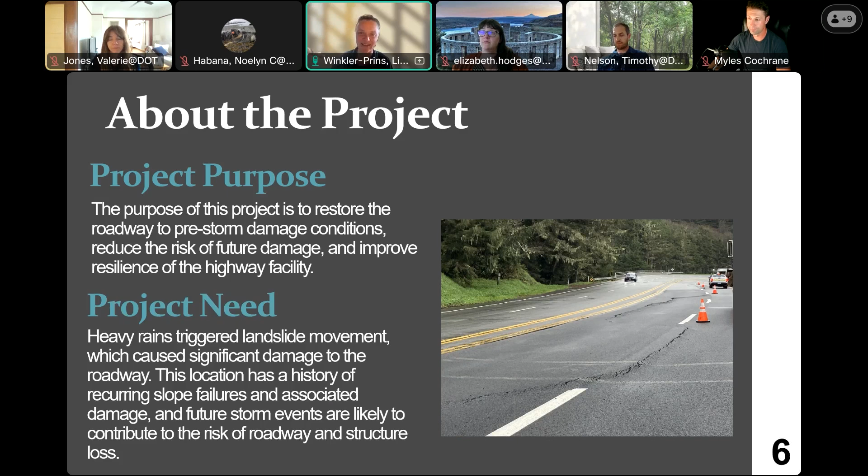And now I'm going to pass it over to June, our geotechnical specialist, to talk about the landslide at the project site. Hi everyone, I'm June, and I'm the project geotechnical engineer. I will now go over some of the key details of the landslide affecting the highway.

The project site is located at the southern edge of the Last Chance Grade Slide Complex. The site is in Franciscan melange geology. This melange consists of a mix of highly sheared siltstones and shale, interspersed with intact sandstone blocks of varying sizes. As you guys probably already know, this terrain underlain by melange is prone to earth flows.

The earth flow at this location that is damaging the highway is approximately 800 feet wide. The head of this slide intersects the road surface, causing an offset crack and settlement that is impacting both the south and northbound lanes. The slide has been measured to be moving at a depth of 90 feet below the highway and toes out onto the beach.

Additionally, the base of the slide along the beach shows signs of ongoing coastal erosion, which in turn exacerbates the global slide movement and creates numerous smaller nested slides.

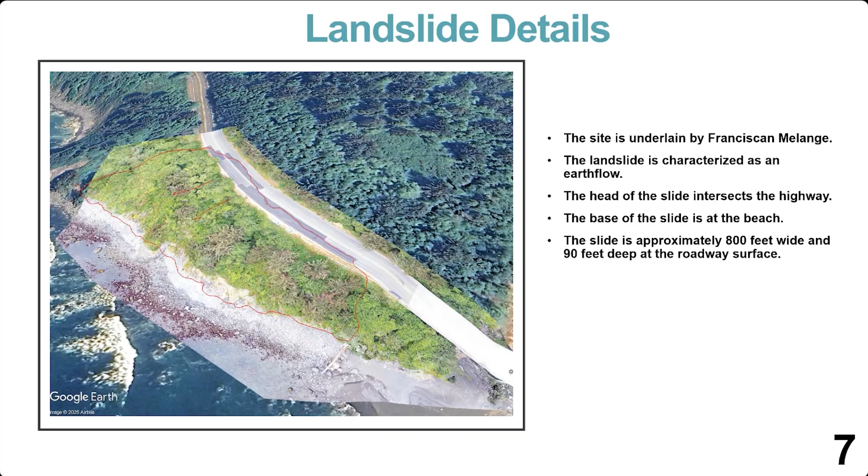The project is located on US Highway 101 in Del Norte County, California, between post miles 12.6 and 13.2, which start near the DeMartin Beach parking lot and approximately a half-mile north at the Vista Point.

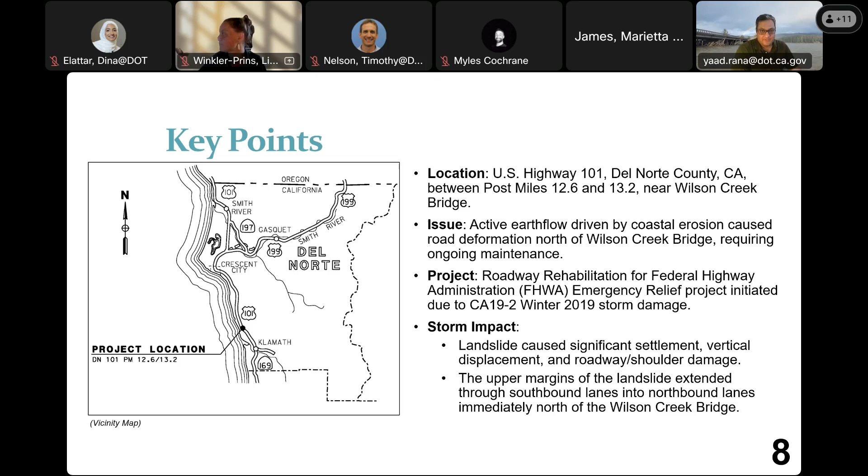The scenic stretch of highway is vital for regional connectivity, but it faces unique geologic challenges. A 2019 storm triggered a landslide that caused substantial settlement and vertical displacement of the roadway, along with damage to the shoulder, extending through the southbound lanes and into the northbound lane.

A value analysis was conducted to minimize environmental impacts, costs, and provide safe and reliable transportation access. The goal was to stabilize a critical quarter-mile stretch from post mile 12.69 to 12.95, immediately north of the Wilson Creek Bridge. This will be done through a modified roadway alignment and construction of retaining walls to contain the ongoing earth flow and ensure long-term stability.

The project will increase the curve radius from approximately 1,000 to 1,700 feet, a 30-foot shift east, which allows for a smoother and safer driving experience.

To shift the road east, a cut will be required that will be supported by a 600-foot long, 19-foot high soil nail wall. This type of wall is supported with steel bars grouted into the mountainside.

The western shoulder below southbound 101 will be supported by a 700-foot long, 55-foot high soldier pile ground anchor wall, or SPGA wall. This robust structure uses deep piles and ground anchors to stabilize the slope and will be buried, leaving only the top 10 feet of wall exposed to the beach.

The project also makes minor adjustments to the passing lanes. The northbound passing lane will begin immediately north of the soil nail wall, reducing its length from 1.54 miles to 1.26 miles. And the southbound passing lane will have a standard lane drop ending at Wilson Creek Bridge.

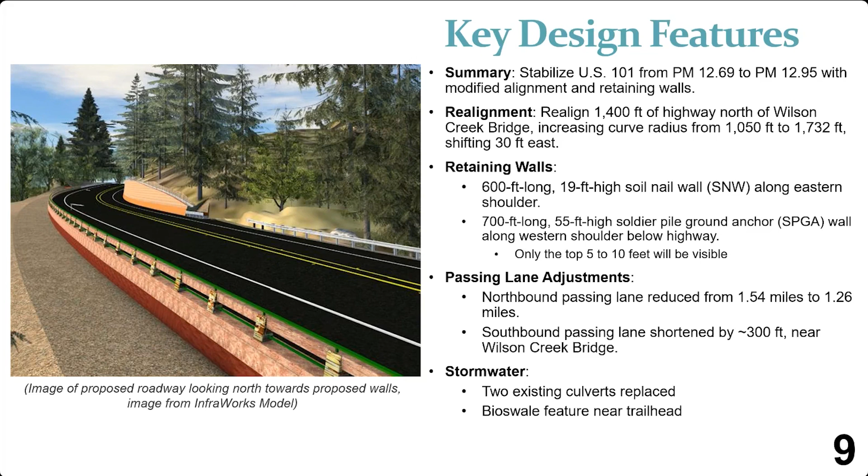Two culvert systems are proposed to be replaced within the project limits. Additionally, a bioswale will be installed to treat impervious runoff and will connect to an existing outlet.

The project will be constructed in two main phases for the construction of each wall, with a final stage for the remaining roadwork. Construction is proposed to start in 2028, ending in 2031.

Last Chance Grade, a large tunnel project just north of this location, is anticipated to start in 2031 and will be in close coordination with this project.

The first stage of this project will widen the highway eastward and construct the soil nail wall. During this phase, two-way traffic will remain open from Wilson Creek Bridge to the Vista Point at PM 13.2.

Once the widening and soil nail wall are complete, traffic will shift eastward to allow the construction of the SPGA wall below the western shoulder. This final stage will use standard traffic control for final paving, delineation, and any remaining work.

The project will utilize maintenance pullouts within the project limits for staging and equipment storage. Excavated material will temporarily be stockpiled at the existing southbound pullout at post mile 12.98 or at an environmentally cleared location off-site. Next are the aesthetic treatments for the project.

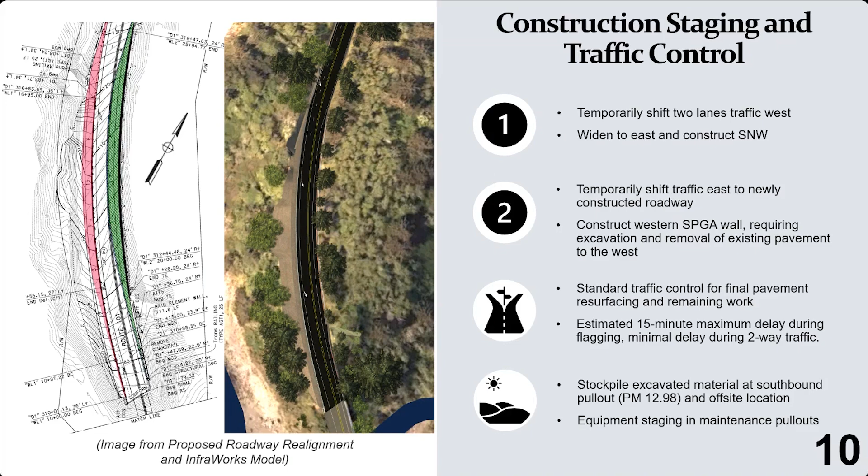The following slides show examples of aesthetic treatment that are being considered for this project. Final treatment will be determined during the permitting process.

When selecting aesthetic treatment for wall types, concrete barriers, and railings, we consider the natural beauty of the surrounding landscape and the large project corridor as a whole. Our design reflects context sensitivity that considers natural landscape, cultural history, and recreational use.

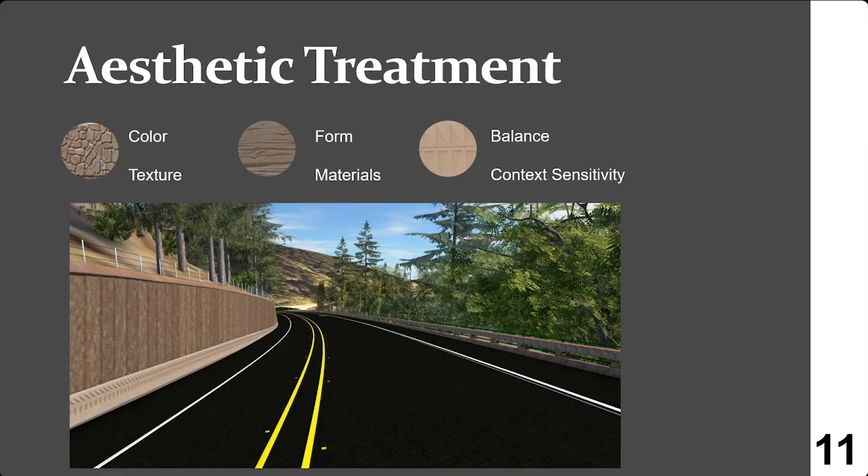We choose materials, textures, and colors that will blend in and complement the natural forms of the landscape. For the soil nail retaining wall on the east side of the road, we proposed a wood grain textured concrete facing that would be stained with a natural brown color to help it blend into the natural surroundings.

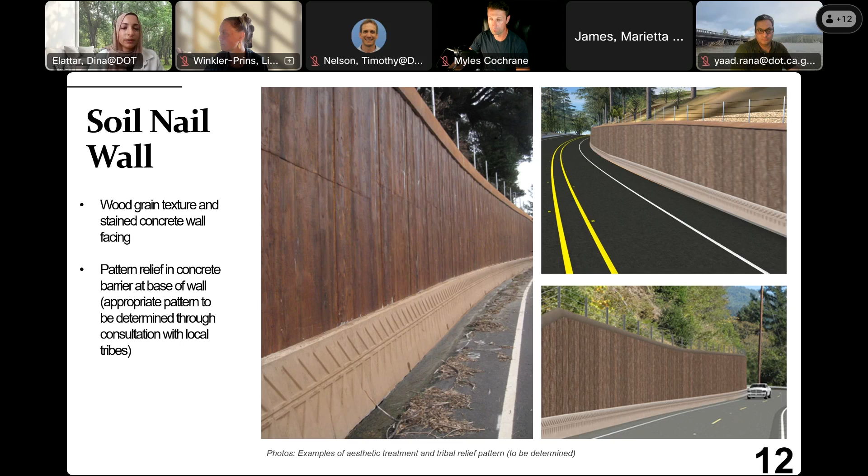At the base of the wall will be a concrete barrier, which provides an opportunity to feature a local tribal pattern and its relief. This slide shows an example of what a relief pattern would look like. The final pattern would be one determined through consultation with the local tribes.

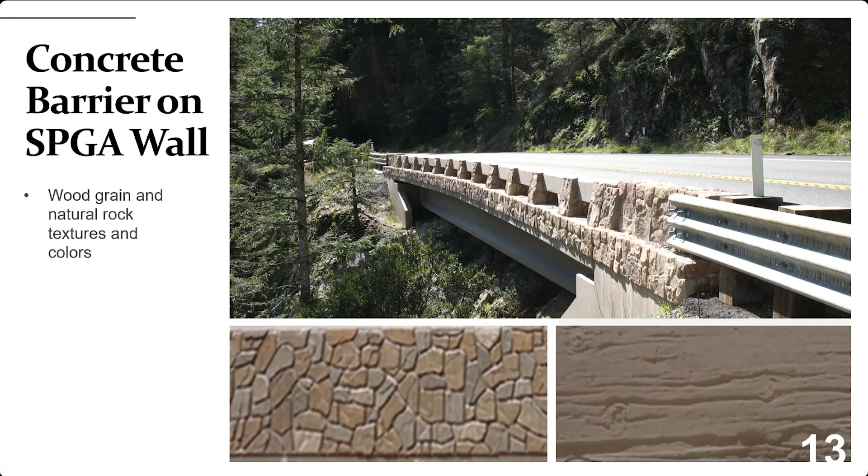For the SPGA wall on the west side of the road will feature a concrete barrier. A natural rock texture facing is being considered for the barrier. Color and texture would be selected based on the surrounding color and textures in order to help man-made elements blend into the natural landscape. The natural stone look would complement the rugged, rocky coastline that is specific to this section of Highway 101.

Similar to the concrete barrier, the barrier railing will also feature natural textures and wood colors. For the concrete barrier railing, a wood grain texture is being considered. The railing would be stained with a natural brown color selected to blend with the surrounding landscape and with a rock textured aesthetic treatment.

The wood grain would complement the texture of the soil nail wall on the east side of the highway, as well as the textures of the redwood and Douglas fir trees that help to define the beauty and character of this area.

Next is circulation and initial study.

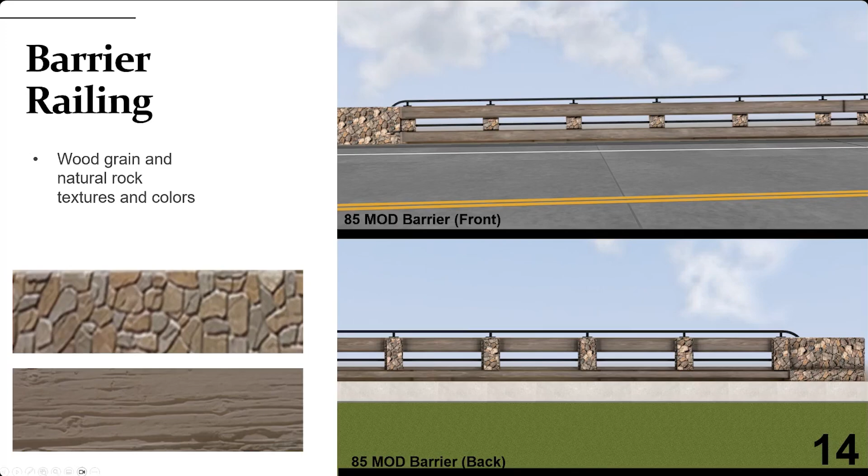Thank you. Good evening. My name is Terra McAuliffe, and I'm the environmental coordinator for the project. I will be talking about the circulation of the initial study with proposed negative declaration and the draft Section 4F evaluation.

Going over the schedule briefly, this draft environmental document was published on July 3rd, 2025 for public review, and the public comment period ends on August 1st, 2025. We expect the final draft of the environmental document to be completed by July 15th, 2026.

Per the California Environmental Quality Act and the National Environmental Policy Act, the project must go through an environmental review process to evaluate the project's potential to impact the environment. Based on the analysis of the environmental resources, it is anticipated that the project would not have a significant impact on the environment. Therefore, the document being circulated is an initial study with a proposed negative declaration.

In addition, the Section 4F evaluation has been circulated as Appendix E of the document for public review. The full document can be found on the Caltrans District 1 project's webpage, which is linked again here.

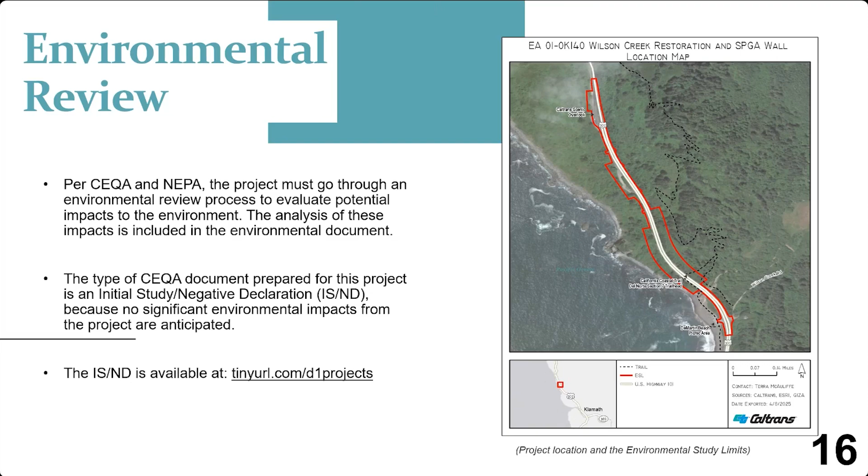To summarize the document's conclusions, the proposed project is anticipated to have less than significant impacts to aesthetics, biological resources, greenhouse gas emissions, and hydrology and water quality. The project is anticipated to have no impacts to the remaining resources listed on the right.

These conclusions were made with the knowledge that the standard measures and best management practices listed in Section 1.7 of the document would be implemented as part of the project.

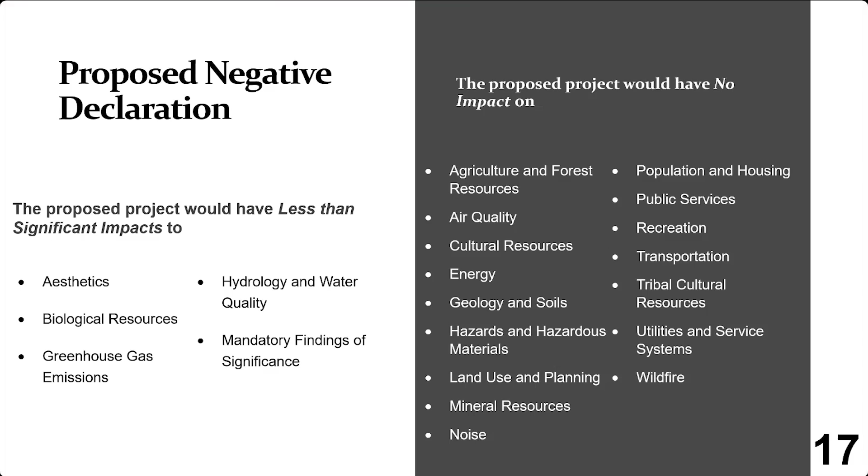The Section 4F resources discussed in the evaluation are related to public land and recreational facilities nearby. Because the transportation use of the Section 4F resources does not adversely affect the activities, features, and attributes that qualify the resources for protection, the work required for the project would constitute de minimis impacts to the resources under Section 4F.

Record searches, field surveys, habitat assessments, and agency coordination and consultation were conducted to determine whether federally or state protected species have the potential to be present in the project area.

These species are listed in Appendix C of the initial study and are discussed further in the plant species, animal species, and threatened and endangered species sections, and also the species tables in Appendix D.

Species considered in the biological analysis include the marbled murrelet, northern spotted owl, coho salmon, and other protected fish, mammals, amphibians, reptiles, birds, and plants. The project would not have a substantial adverse effect, either directly or through habitat modification, on these species.

Access to this trail would be closed during construction, as the Caltrans pullout is within the lane closure and construction zone. After construction is complete, the trail would be accessible again.